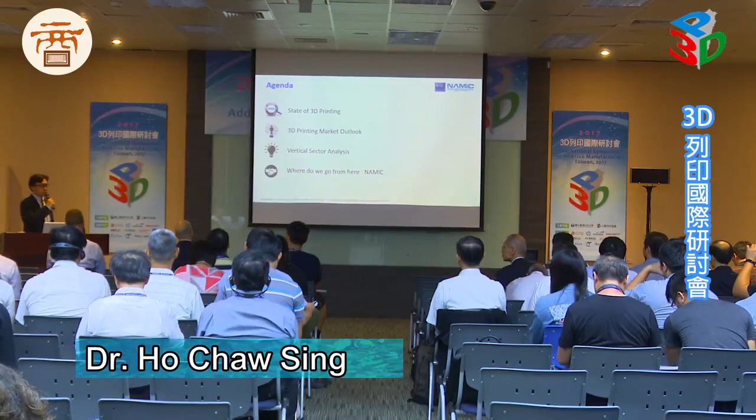So I thought it's good to paint a picture of the current outlook in the 3D printing market. There's also some vertical sector analysis, which I leveraged from Frost & Sullivan, to share with the audience. And then I'll share with you what Singapore is doing in this space.

So I guess for all of you here, you're all additive manufacturing experts and enthusiasts, you would know this story. This journey has been around for at least 3 decades, started from rapid prototyping. In recent years, we've seen a lot of good examples coming from industry announcements, especially from GE Additive, as well as the entry of Hewlett-Packard into this space.

So this spells a great promise, and I guess when giant companies like this enter the market, you know that the market is pretty much ready, right?

This is a hype curve that most of you may have seen, and I've been looking at this chart since 2 years ago when I first was recruited by the government of Singapore to join this outfit. You can see that in different applications, whether you're talking about printing bio products or more conventional tools and molds, everything is basically advancing in this space.

If you talk about organ printing and tissue, obviously these are still pretty much hyped up at this juncture, although there's been a lot of science research output in recent years that suggests this is no longer science fiction.

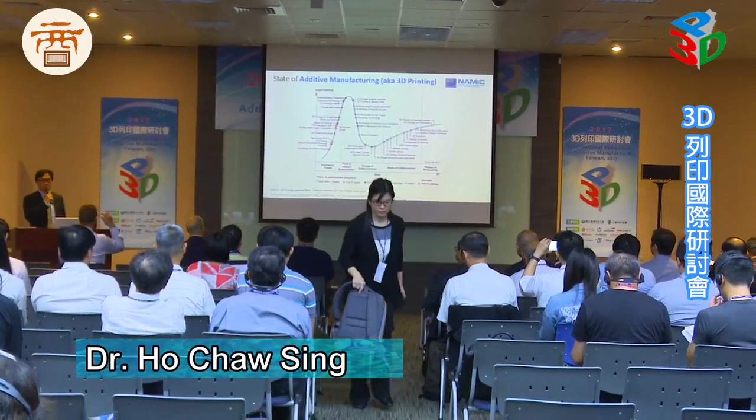I think in the current state of affairs, you can see 3D printing service bureaus, whether in the United States or Singapore, we're starting to see companies springing up offering very specialized services for either prototyping or manufacturing.

And of course, if you talk to people around us, these are typically some of the concerns. A lot of companies that I talk to in Singapore basically say that there's potential, but they're not really sure what sort of business value add this is going to bring to them. There's generally a lack of infrastructure in the private sector.

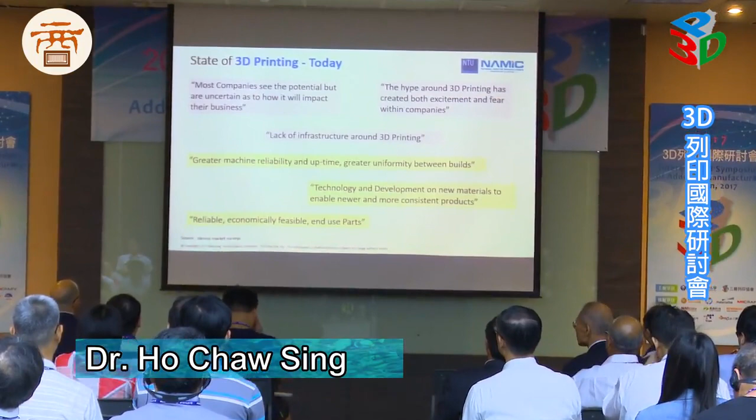I won't comment too much on the public sector. Obviously there's a lot of government funding, but the private sector still needs a lot of space and investment in the next several years in order to make this technology truly impactful and transformational.

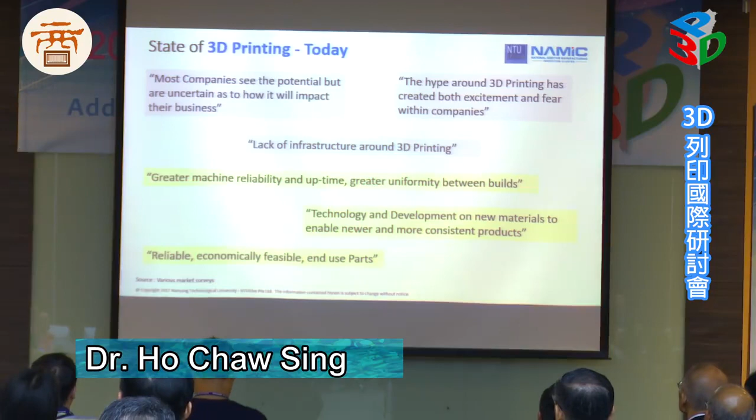And of course, as much as this technology has been in research for so many years, there's still very much a lack of standards in several application spaces, particularly in the making of highly complex parts, whether for aviation or biomedical products.

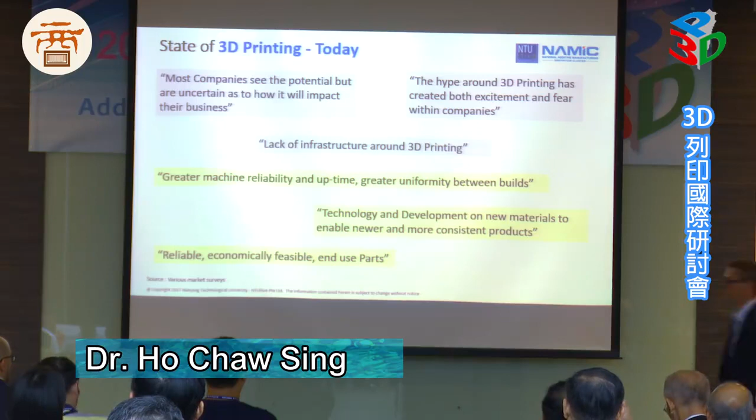Economics of 3D printing: the excitement around 3D printing offers mass customization at a cost that is not possible with traditional manufacturing technologies at a scale level.

If you talk to different power users, you'll notice that in the space of product development, this is a fantastic tool and technology for most product developers, whether you're a consumer hobbyist or building products for the enterprise space. This is truly transformational technology.

I think all of you would agree that 3D printing costs in the future will definitely decrease with the amount of effort, focus, and resources poured in.

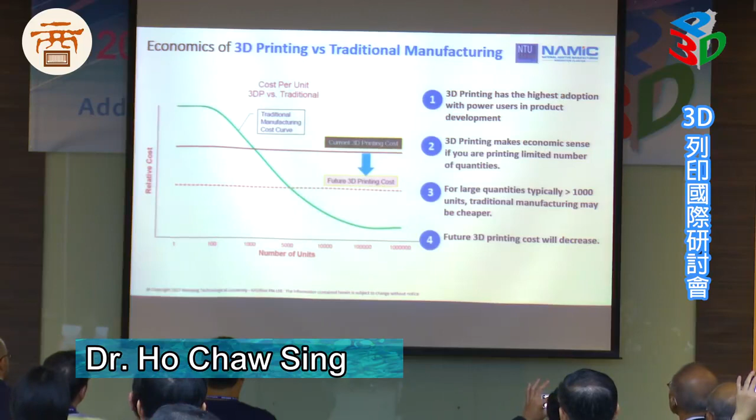Now a little bit on the market outlook. This is taken from a few published research reports that I managed to leverage. Since we are in Taiwan and part of Asia Pacific, I thought it's good to give a view of Asia Pacific. Actually, Asia Pacific has the most amount of manufacturing activity in the world.

It's about half of the $12 trillion in manufacturing revenue that actually exists in Asia Pacific today. According to the report, we believe this is going to take the lead in 3D printing growth, especially in Asia Pac. At the current moment, North America and Europe still account for 2/3 of the 3D printing market revenue, but most reports believe Asia Pac will catch up.

In fact, based on the latest reports, whether from Wohlers or other sources, they're basically showing double-digit CAGR growth. Right now, China, Japan, South Korea are the dominating leading members. But with the efforts that Taiwan, Singapore, and other countries are now putting in, I believe there'll be 6 or 7 major players in the next decade or so.

In terms of market segment verticals and applications for 3D printing, the 4 main applications coming up so far, based on statistics I'll share in a while, are primarily in the aerospace sector, automotives, medical, dental, and consumer. Services are set to be the fastest growing, with a CAGR of about 34.5%. Services include design services, prototyping, and short-run manufacturing services.

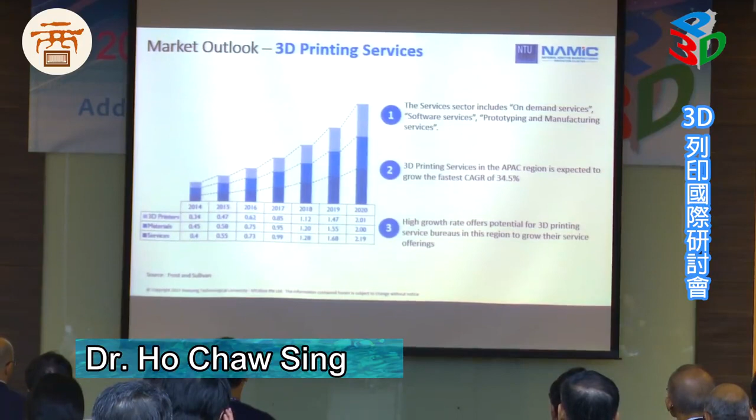In the future, we believe Asia-Pac will grow, and a lot of these companies already have Asia-Pacific offices for that reason - they're investing aggressively. Even in Singapore, a 5.5 million island state, most of the major players, from the German and Swedish companies, have set up competency centers in additive manufacturing. Obviously there's a lot of room for growth in this.

We believe the reason for a lot of these demand drivers is mainly the potential for on-site production, on-demand materialization of complex durable parts in remote locations where it's not easy to transport or produce these parts. And of course, mass customization in this space - for example with healthcare - offers the potential to improve patient-specific outcomes.

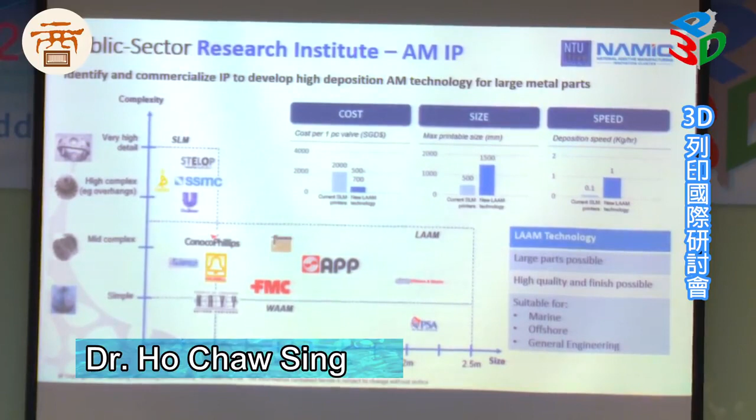One example to share: a company in Singapore in the marine offshore sector wanted to create a service bureau dedicated to marine offshore and oil and gas. Singapore, despite its size, has one of the largest petrochemical refinery facilities—we actually have a separate island out of Singapore Island to host those. Shell, Mobil, Exxon Mobil and so forth are all there.

This company worked with us. We looked at the current technology offering out there, and then decided we would work with them to develop customized systems that would cater to what they need to service their customers.

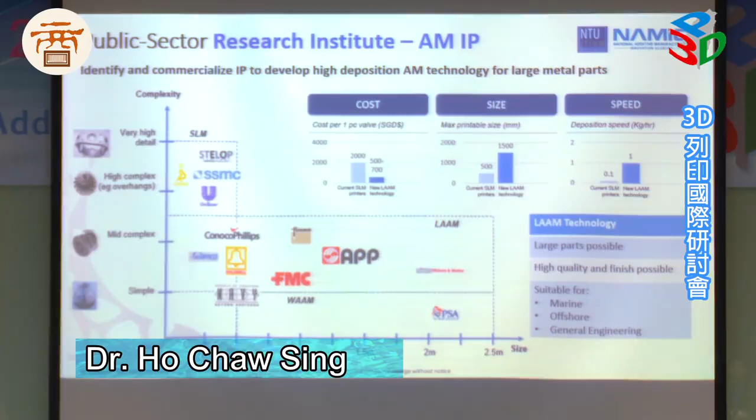Some of the pain points in the current state-of-the-art technology today: large parts are still highly costly to build. It doesn't make sense most of the time to build large parts with 3D printing. However, there are some business cases for those kinds of things.

For example, if a ship docks and has parts that need to be replaced, they'd typically have to wait 6 months for the custom part from South Korea, and that itself is a problem. With additive manufacturing and on-demand production, we could potentially build these parts on-site at the Singapore docks within 2 weeks, certify it through a class company like DNV, GL, or Lloyd's Register, then install it and off you go. This would transform and disrupt the entire current supply chain for the marine offshore sector.

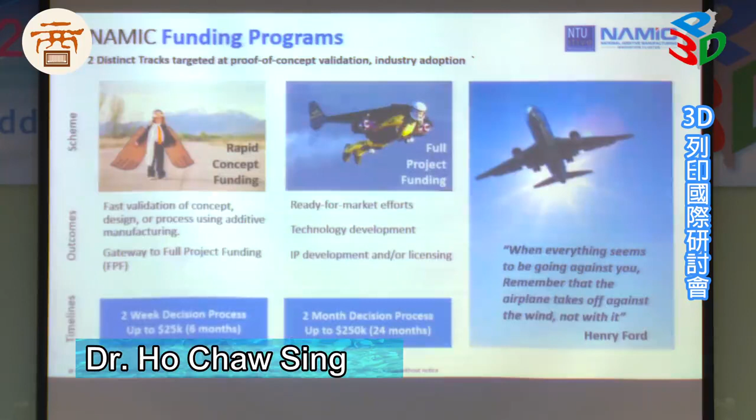I mentioned we have funding programs, so I'll skip this. We have global partnerships—some of you may be familiar, as these have been announced in the news. We have a tie-up with Invention Science Fund, LLC, a Seattle-based private equity company with a network of IPs around the world.

One of the not-so-talked-about areas we looked at is cybersecurity—when you think about the digital supply chain, how do you securitize the transfer of digital files, which are essentially IPs of the companies.

At the same time, you need to be able to have solutions for the machines on some of these satellite distributed manufacturing sites, to decide whether they can print, how many times they can print, and so on. So these are the type of things we are exploring, and we are actually developing some solutions around this with them.

There's a startup, Gilmour Space Technologies. This is a startup with an Australian guy, but he's based in Singapore. So we're looking at application in this emerging space industry. To date, this looks like science fiction, but within our lifetimes, I think in the next 30 years, the space industry will take off. So we are developing hybrid fuels using 3D printing, and we help them develop a customized system to enable that. Most recently, they got their first Series A funding from Australian investors.

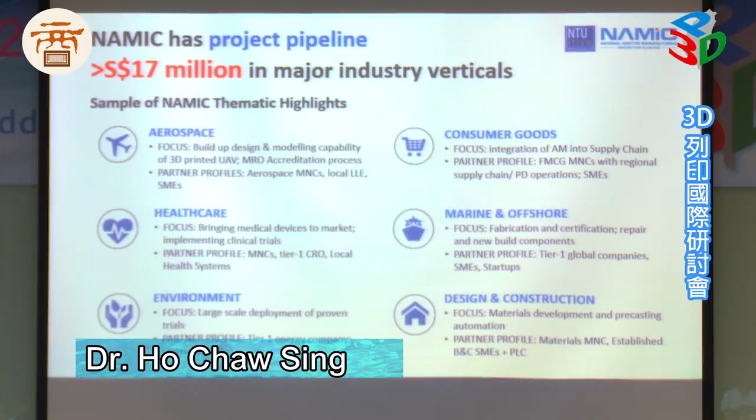I probably want to share one final thing on the startup ecosystem. This is something very close to my heart personally. It was interesting when we first started this program office - we found that a lot of startups approached us, I guess primarily attracted by the fact that we offer funding. But they soon found out that we are not VCs. Still, we could help them through supporting some projects to develop the technology, fine-tune it, and even to some extent, market access as well. So we work with not just local companies.

Another story is on Structo. You guys may have heard of Carbon 3D, but perhaps not Structo. In terms of technology, it's a vat polymerization based technology. They have established a focus on the dental market, and in the last short span of one plus years, they have actually sold something like 40 to 50 machines. So very, very up and coming in terms of potential.